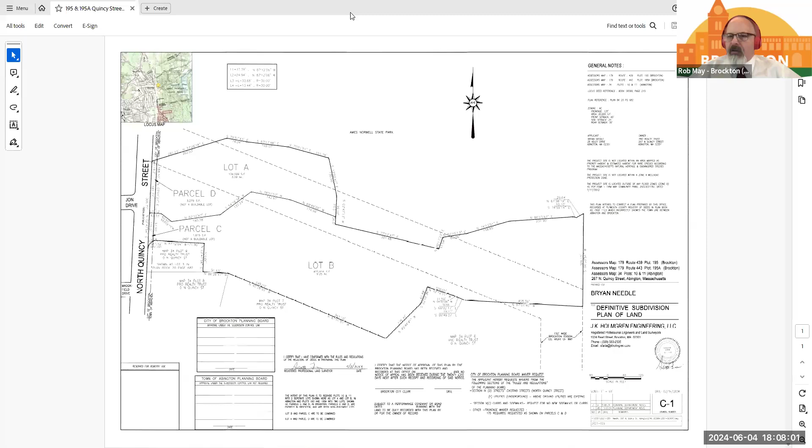Ladies and gentlemen, if you would like to comment on this subdivision, please use the raise your hand icon, which you can find at the bottom of your screen. If you hover over the very bottom of the screen, a menu bar shows up, and you'll see an icon that has its hand up. Press that icon and we can open your microphone and let you speak. And Madam Chair, at this time, I do not see anyone wishing to speak.

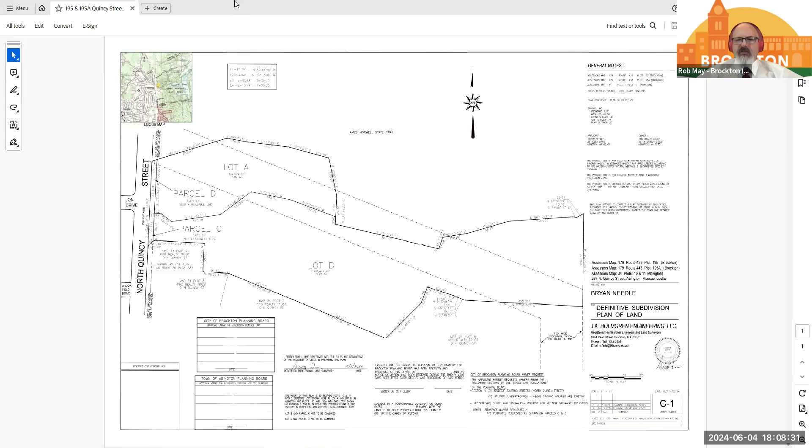All right, thank you. Is there a motion? I make a motion to approve with standard conditions. Second. Is there a second? Yeah, I second that. Okay, roll call: Marty, yes. Yolando, yes. Tony, yes. All right.

Next, 0 Field Street, which is a definitive subdivision, asks for a continuance. Is there a motion to approve? Motion to approve the continuance. And I second that. Okay, roll call: Marty, yes. Yolando, yes. Tony, yes. All right, thank you.

Next up, site plan review for 137 Perkins Avenue, again JK Holmgren Engineering. Scott, still on the line? Yeah, I am, Madam Chair. Thank you very much, Scott Faria, Holmgren Engineering. And again, I appreciate the planning department's help here.

I think if you go to sheet number 2, Evan, if possible. What we have before you tonight, folks, is a site plan application for what used to be referred to as the Candy Factory at 137 Perkins Ave. It's a big, 4-story but extremely tall existing building that's been there forever. I'm representing the Foley Management Group, who are hoping to turn this building into a self-storage facility. We've already received ZBA approval for that use.

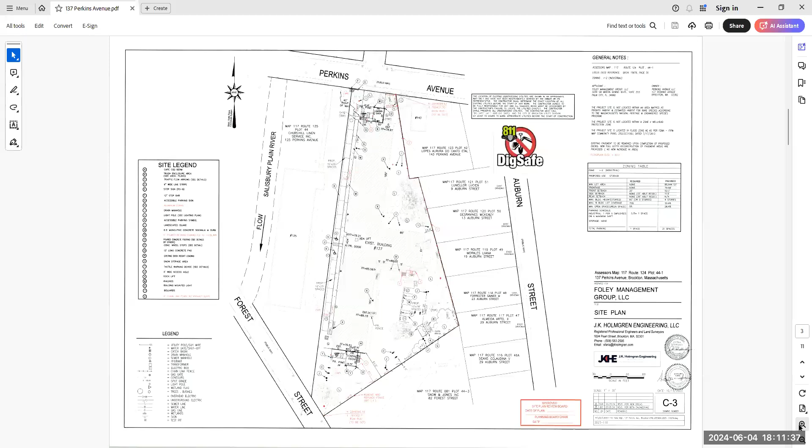It ends up being 4 levels total, and on each end of the building, the Perkins Ave end and the Forest Street end, there is a loading dock that you would be able to drive your vehicle up to. There is going to be an automatic loading dock lift, so you would be able to wheel a refrigerator onto the lift. There's a hydraulic lift, it'll lift up to the loading dock, and then from there you can wheel it into the building, and elevators within the building to get you up to your floor and up to your particular unit.

The site, as it stands, there's a common driveway between 125 Perkins and our building at 137 that runs from Perkins out to Forest Street. That's going to remain. There's a parking lot existing on the Forest Street side of our property; we're going to maintain that parking lot. We're going to create 6 parking spaces within that parking area, and there'll also be a loading dock on that back wing of the building. We are actually removing a little bit of paving, so there's a little less impervious area once we're done with the construction than there is currently.

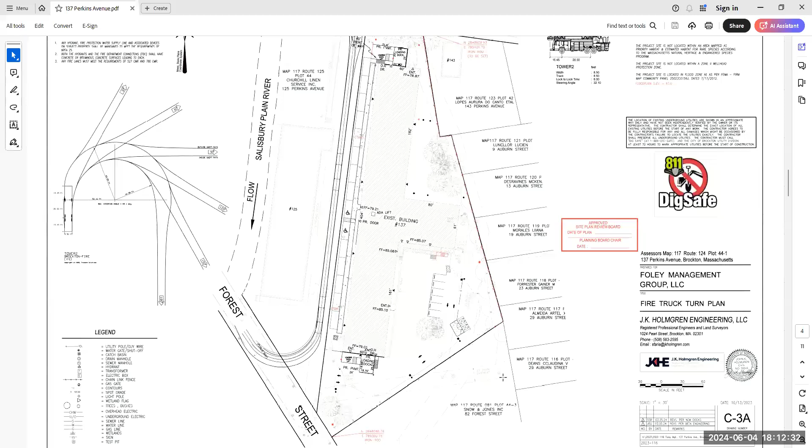Also, to get us in compliance with the stormwater management regulations, if we flip to sheet C4, there is a rooftop infiltration system to handle the roof runoff towards the Perkins end, the Perkins Ave wing of the building. There's a large infiltration system, so that will handle all the runoff from the roof. There is also a compensatory storage and detention basin in the eastern corner of the property. So those 2 items will handle all the runoff from the site.

Currently, there's essentially no drainage on the site at all. It all runs uncontrolled out to the street and eventually dumps to the Salisbury Plain. So we certainly feel like this design really is a benefit to the site and the area in providing

some needed treatment for the surface runoff before it hits the Salisbury Plain River. The one other tricky thing about this site, and we went round and round with Beta on their review for a couple of months, the entire site and really this entire block of the city falls in the flood zone. The flood elevation is roughly 4 or 5 feet higher than the entire site, and in fact higher than the entire streets and abutting houses.

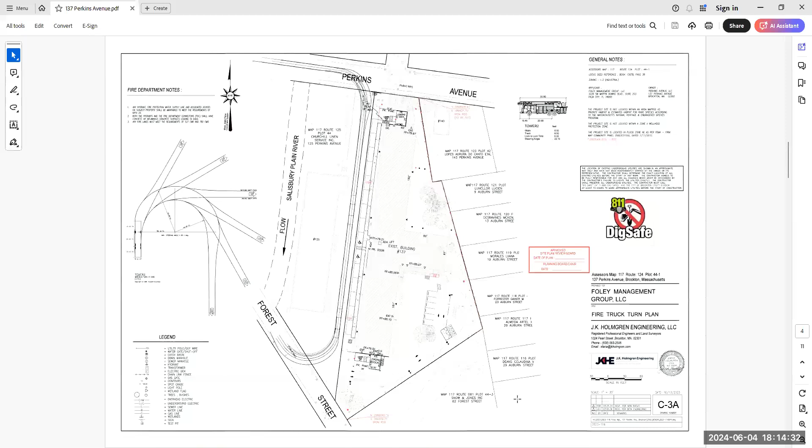So at this point, any work that we do on the site, any fill that we put on the site, we have to do what's called a compensatory storage area, to make sure that we're not displacing any floodwaters. Because of that, we've gone back and forth and come up with this loading dock design where these 2 proposed loading docks are essentially on columns, and they'll be made of steel grating, so the water will be able to drain through them, and they don't impede the water or take up any flood storage space at all.

So that was our biggest issue in dealing with Beta Engineering in the review process. As I said, we're through that. Once we receive site plan approval, we know we have a stormwater management permit that we will have to apply for and go through that process with the stormwater authority once finished with you folks.

All right, thank you, Scott. Could you tell us what hours of operation the owner has in mind?

I believe, and it was part of the ZBA approval, it is 7 in the morning till 7 o'clock at night, 6 days a week. On Sundays, the hours are a little bit more limited, and everything is key code to get in, a fob to get into the building and then into your particular unit.

Okay, so it's zoning then, right, Mr. May, that restricts the hours? Yes, zoning did restrict the hours. Scott is correct, it's from 7 to 7. And that is a concern of the ward councilor, Susan Knight Castro, who couldn't be here this evening. But we don't need to condition it beyond what the zoning board of appeals has done.

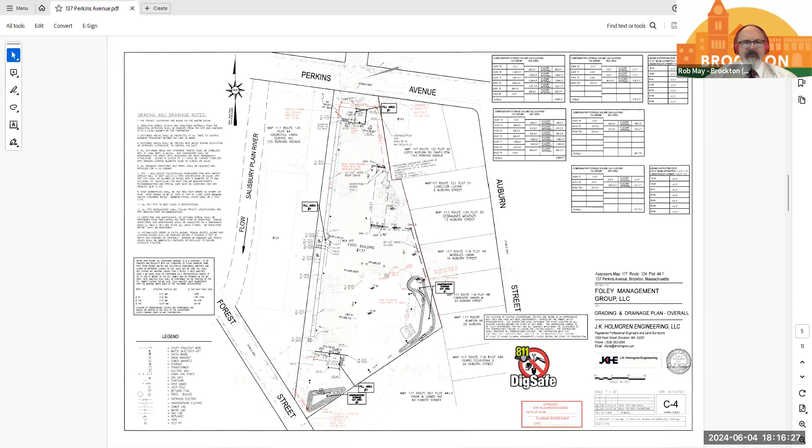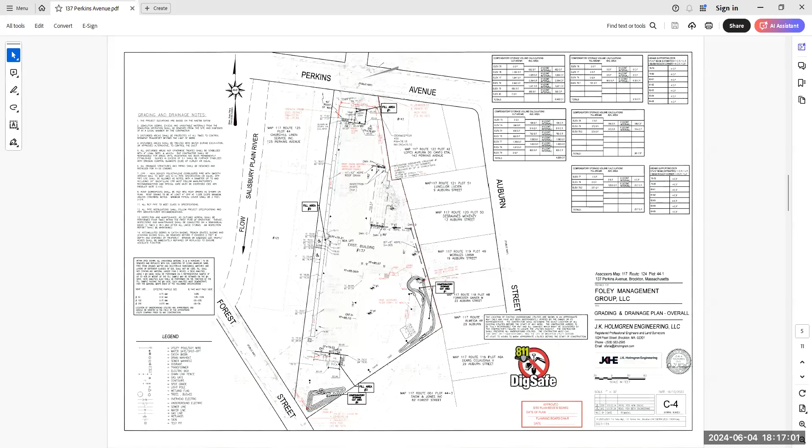And then Scott, as far as the parking lot, do you have lights there? Councilor Castro is asking if they'll be downward facing, to not bother the neighbors. Yes, there are, Madam Chair. There's downward facing lights around the parking lot. There's building lights to provide lighting between the two buildings, 125 and 137. But on the back side of the building, where it abuts the residential properties on Auburn Street, there are a couple of lights there, and they are downward facing, dark sky compliant lights, Madam Chair.

All right, and she's asking if they can be on a timer. Is that typical, or do we need the lights on for security as well? Yeah, I would think for security we would want them on, Madam Chair. Yes, would agree with that.

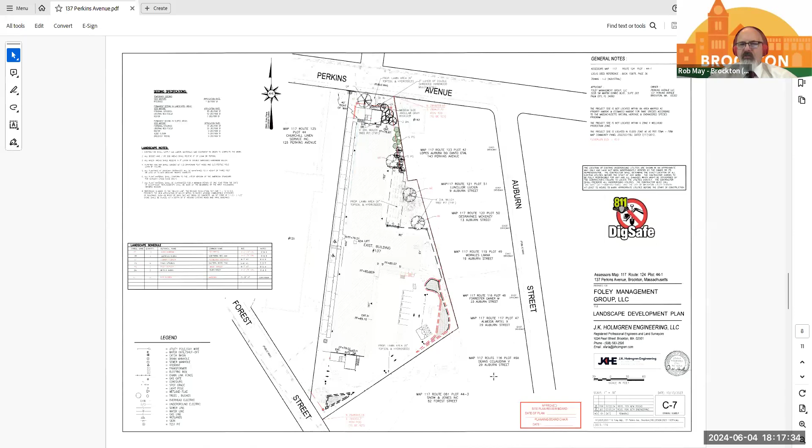Then, Mr. May, who enforces having the drains cleaned out periodically, the stormwater drains? The stormwater system is on private property. The street that runs between Forest and Plain is private property, and the property owners would be responsible for any maintenance that goes along with those stormwater systems.

Yeah, that's correct. So is there anything we need to do to make sure that they have these scheduled to be cleaned out periodically? Yeah, just to expand on that, Madam Chair, it's part of the order of conditions from the Conservation Commission in compliance with DEP stormwater management. We have to do routine twice-a-year

inspections of the system and submit those inspection reports. All right, thank you. That's part of the standing order of conditions. If it wasn't done, then they would be subject to a wetlands violation, as anybody else would.

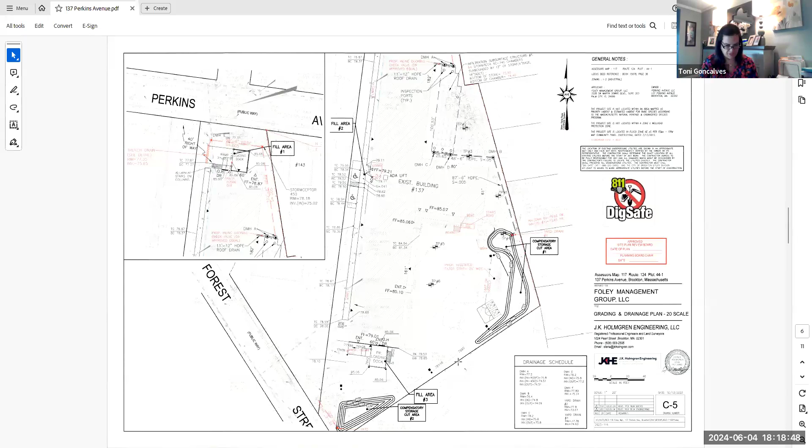Okay, and I see the stormwater issues were addressed, and Chike's been involved. It's gone through multiple visits with tech review. Correct. Any questions from other board members?

Yes, Madam Chair, I have a few questions. I guess one is, is there any renderings of what the building's going to look like, what the lot will look like after construction? And another question would be if the footprint is going to change, the footprint of the building itself. Yeah, the footprint's not changing at all.

I believe we submitted renderings. There was a rendering package. To be honest with you, it kind of looks like all those storage facilities do. They're just big buildings, glass front, which we call dummy glass. It's a glass exterior, but there's a wall behind it, so you can't see in or see out. But it's a glass type of front.

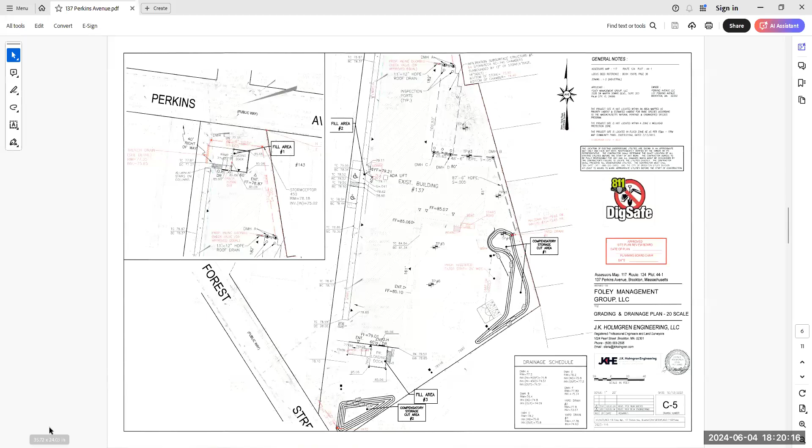We are adding some landscaping to the site, but besides modernizing the building, redoing the parking area and striping it, it's really not going to look any different at all than what's there now. Just obviously a new facade, but it's the exact same building footprint and essentially the same parking footprint, except for a little area that we're removing of paving.

So it will just be like a renovation of the existing building? Exactly.

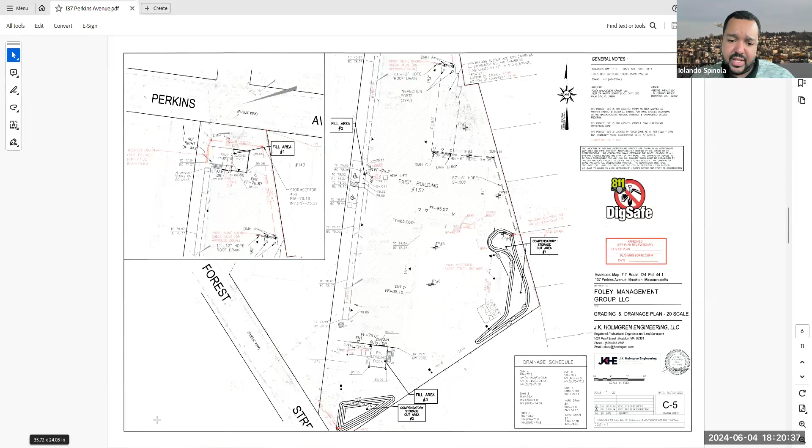Okay, and for vegetation, can you clarify what type, what it will look like, the new vegetation that will be added to the site? Yeah, on the Perkins Ave side, that's probably the most extensive landscaping that we can do, just because there's some actual green space there.

So between our building and Perkins Ave, we have 11 inkberries shown, just going to try to get my names right. We have a couple of red oaks, which Mr. May is usually fond of. We also have 3 river birches shown, all in that cluster between Perkins and the very front of the building.

Then alongside the side lot line that would abut 143 Perkins, the house that's closest to the property, we have a series of evergreen trees. We have red cedar and white pines proposed there, just to give more of a buffer from the folks at 143 Perkins to the existing building. Even though it's been there forever, we're still trying to do that.

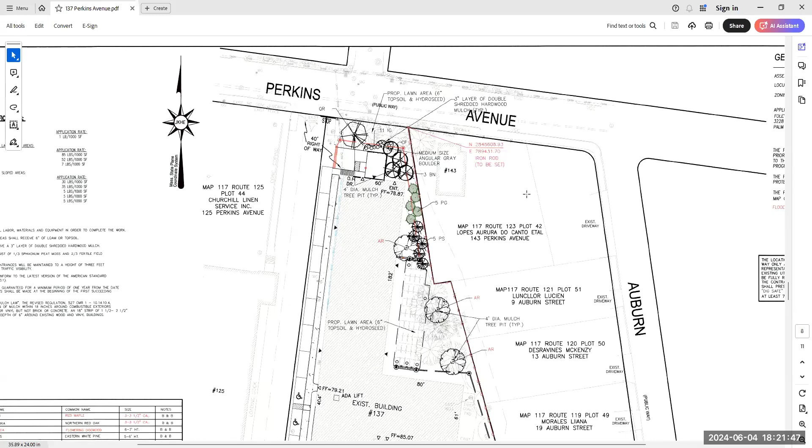So we've got those evergreen trees and also a red maple proposed. Then as you go further down the building, we're a little bit limited as to what we can do, because we have that large infiltration system, and we can't have root systems around it because it'll plug up the system. But along the perimeter, we are proposing a couple of red maples there that kind of abut numbers 9 and 13 Auburn Street. So that's really the most extensive plantings that we're doing right there.

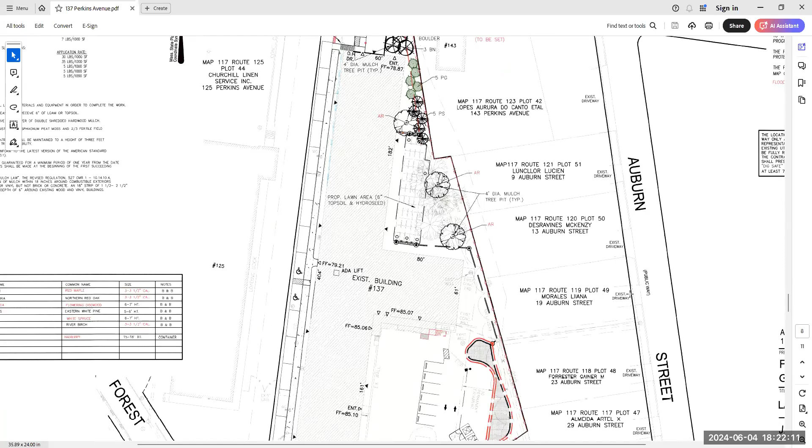Great, and I guess another question is, for the clientele, is it the general public going to be utilizing the facility? Is there a specific audience that you imagine utilizing the storage facility?

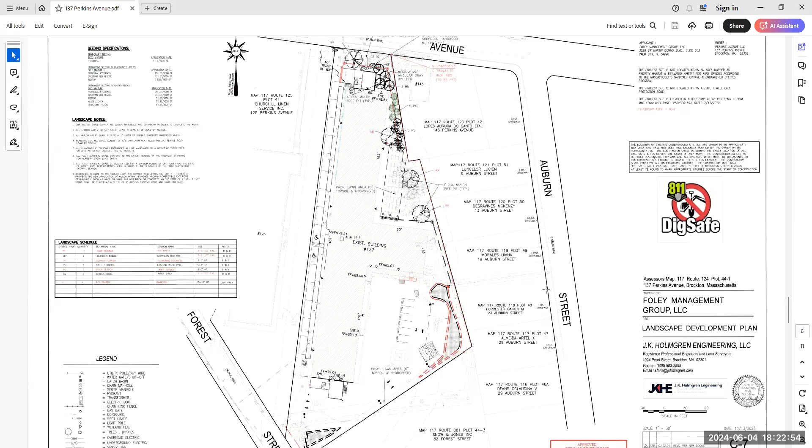No, it's as we've talked about before, with all the apartment complexes that we see getting approved and hopefully getting built, especially downtown, most of these residential units that you folks are approving don't have any closet space. There's no storage and there's no closets. So that's the majority of people moving into these storage facilities in Brockton and the surrounding area, people moving into these apartments who just don't have room for their winter clothes and Christmas decorations.

Okay, great. Thank you. Thank you. All right, Marty, do you have questions? No, I do not. All right, thank you.

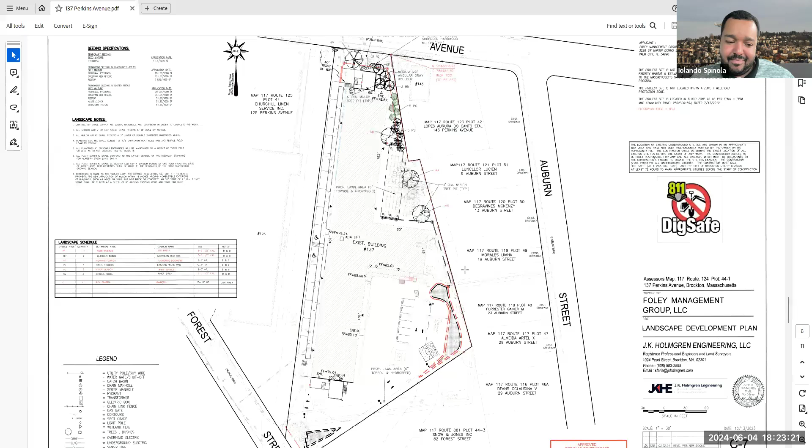Mr. May, open to public. You're muted, Mr. May. I had something nice to say about you, and I guess it got lost. Ladies and gentlemen, now is the time to ask your questions. Please use the raise your hand icon at the bottom of the screen, and we can unlock your microphone so you can address the board and the developer's representative. Madam Chair, at this time I do not have anyone using the raise your hand icon.

All right, thank you. Is there a motion? Motion to accept. Second. All right, roll call. Yolando? Yes. Marty? Yes. And Tony, yes. All right, thank you, Scott.

Thank you so much for your patience. I feel like I say that every month to you folks, but thank you very much, and I can't wait to get in person again. Have a good night, guys.

Thanks. Okay, Scott. All right, next up, site plan review, 159 North Main Street, representative Orwig Associates.

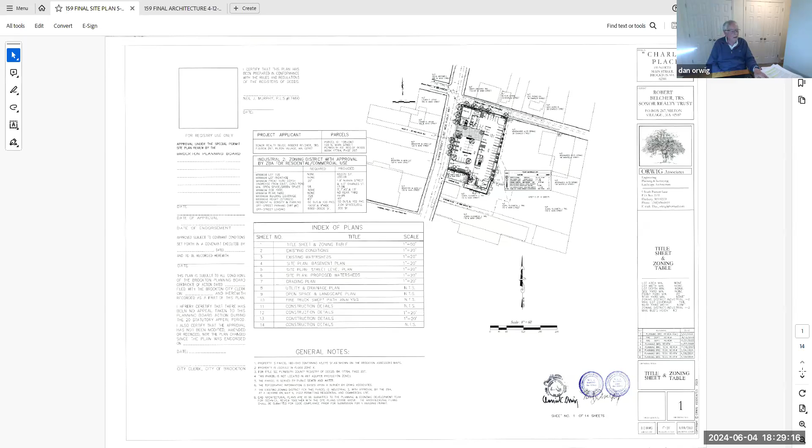I don't know if you have, Evan, sheet 9 there or not, but that's the landscape plan. We think this particular property is a key location because it's at the corner of Charles and North Main Street, and it's approximately an acre of land. The building that's there is really dilapidated and needs to be changed. Sheet 9 has the landscape plan and shows the character of the project. That's the existing conditions. Now the existing building covers 50% of the site.

We propose an L-shaped building, not as close to the street as the present building. This is sheet 9, and it shows the landscaping of some parking underneath the building and parking on the street level grade floor, with some limited outside parking. We eliminated the commercial space on the street level floor. In order to handle trash removal in an acceptable way with a trash chute, we had to extend the building a little bit to Eldridge Place, and we now have an acceptable trash removal program. The infiltration basin is underneath all of the parking that's in the crux of the L shape on North Main Street, right there. We have our plantings on all property lines for screening.

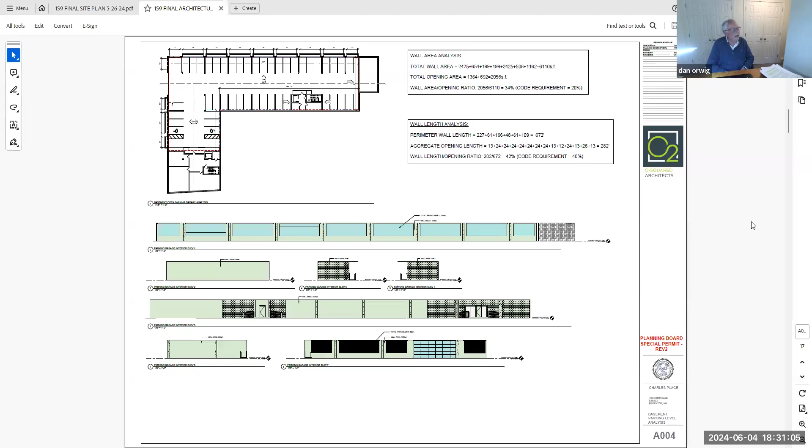The architecture has done analysis of the lighting, and we have a lighting plan for the architecture. I think that sums up where we are with the project. We think it's a good asset to the city of Brockton, and we're now working on this tax incentive program with the 2 other projects for this area, and we may be amending the tax incentive program in this area. Are there any questions? Thank you.

I actually do not. I see that Cheke, the engineer, you've addressed his concerns. Marty or Yolando, any questions? No, I don't. Okay, no, I don't either. All right, good job, Mr. Orwig.

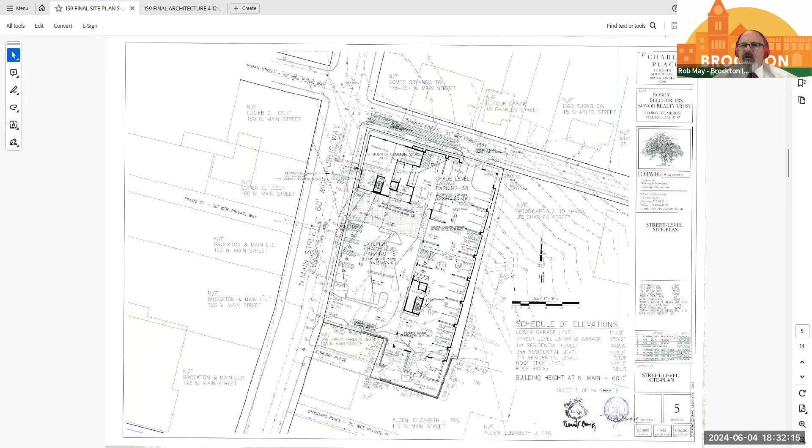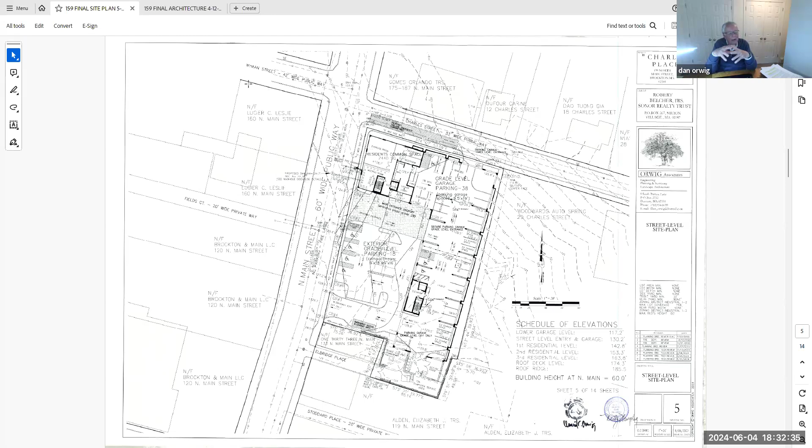All right, thank you. Is there a motion? Motion to accept, second. All right, roll call. Yolando, accept. Marty, yes. Tony, yes. All right, congratulations, thank you Mr. Orwig. Thank you very much. It's been a pleasure working with your team. Thank you.